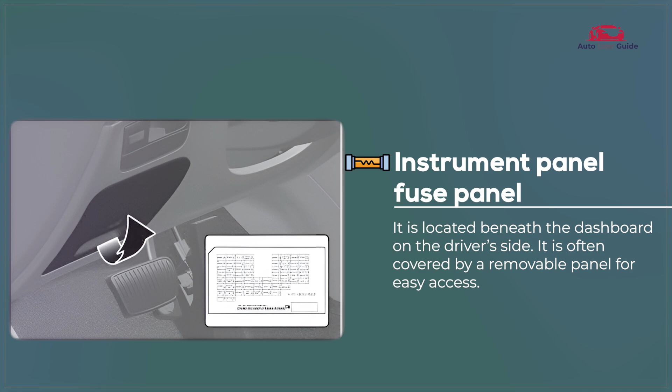Instrument panel fuse panel: The instrument panel fuse panel houses fuses for various electrical components in the vehicle. It protects circuits from overloads and helps maintain electrical system functionality. Accessible and labeled, it ensures easy fuse replacement when necessary.

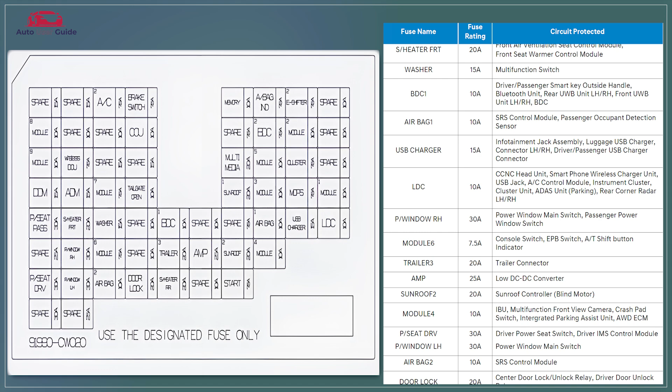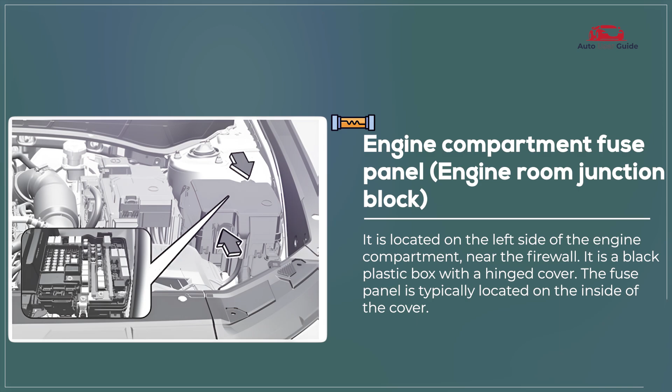Engine compartment fuse panel: The engine compartment fuse panel protects critical engine components and electrical systems. It houses fuses for the engine, cooling system, and other essential functions. Located near the engine, it ensures easy access for fuse checks and replacements.

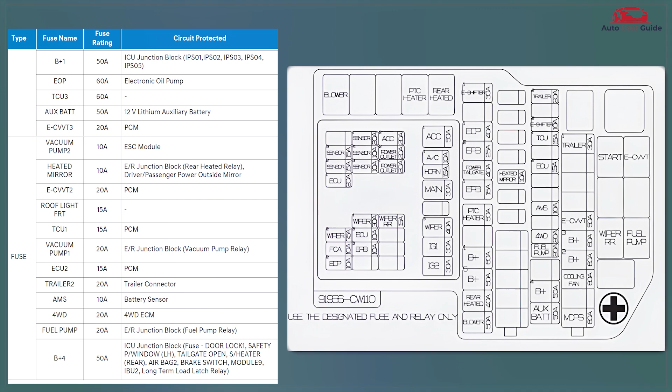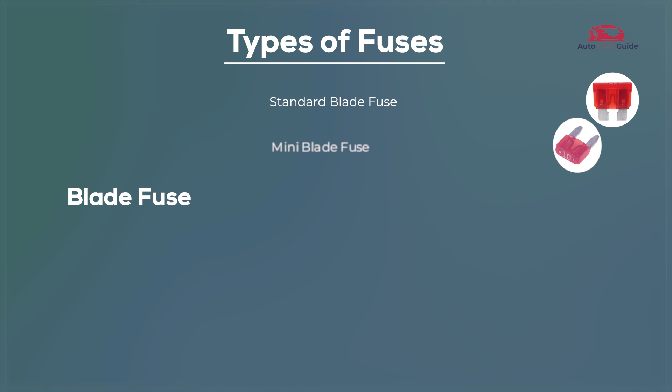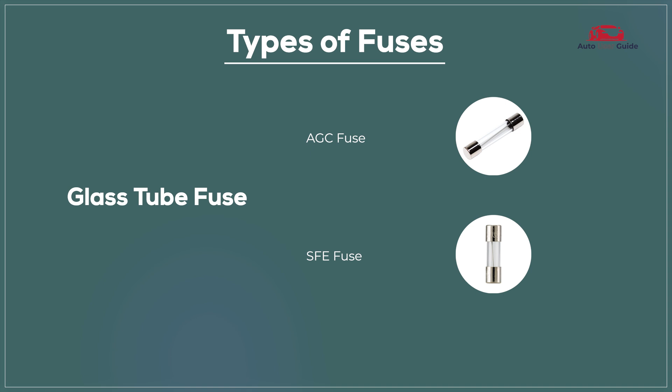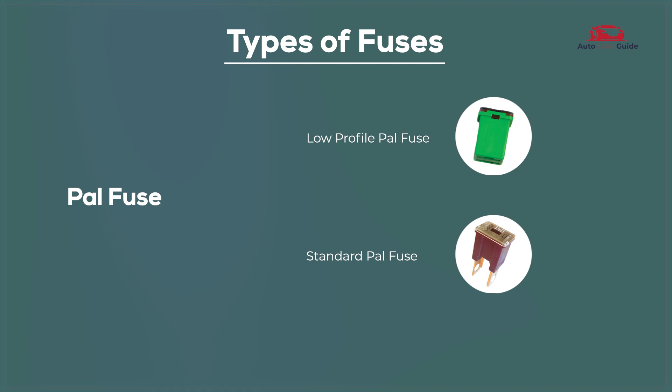Types of fuses: blade fuse, standard blade fuse, mini blade fuse, maxi blade fuse, micro 2 fuse, micro 3 fuse, J-case fuse, glass tube fuse, AGC fuse, SFE fuse, ceramic fuse, Bosch fuse, DIN fuse, PAL fuse, low profile PAL fuse, standard PAL fuse, link fuse, mega fuse, high amperage link fuse.

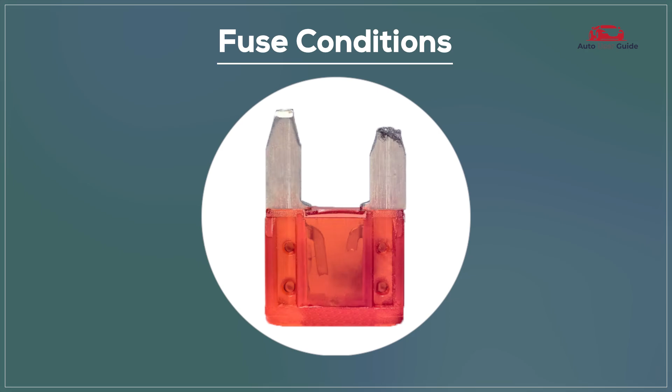Fuse conditions: a blown fuse means it's no longer functioning and needs replacement, while a perfect fuse is in good working condition and performing as expected.

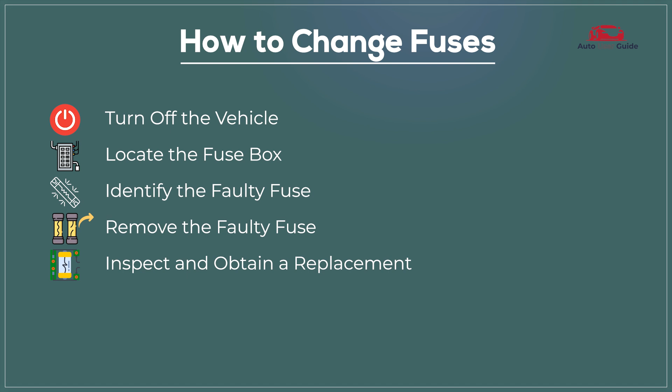How to change fuses: turn off the vehicle, locate the fuse box, identify the faulty fuse, remove the faulty fuse, inspect and obtain a replacement, install the new fuse, and test the replacement.

Safety precautions: disconnect the battery, wear protective gear, use proper tools, check for correct amperage, and avoid water exposure.